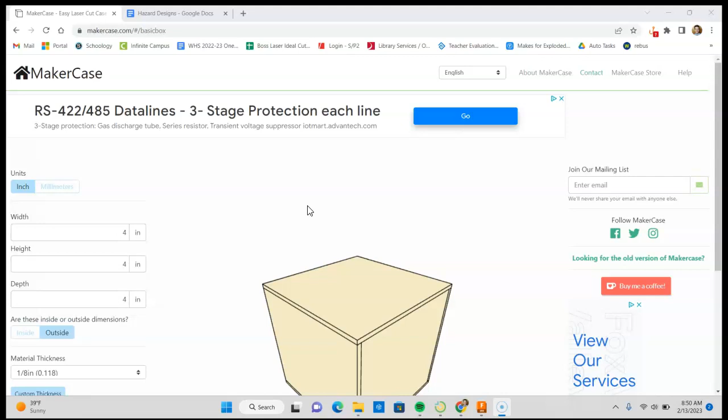Alrighty, folks, recording a quick video here to show you what you can do in Fusion when you are making your hazard designs. So we'll start here really fast with MakerCase. I will make my case, let's say 20 by 4 by 4. This is going to be my base hazard. Those are the outside dimensions, 1/8 thick because that's the 1/8 MDF we're using.

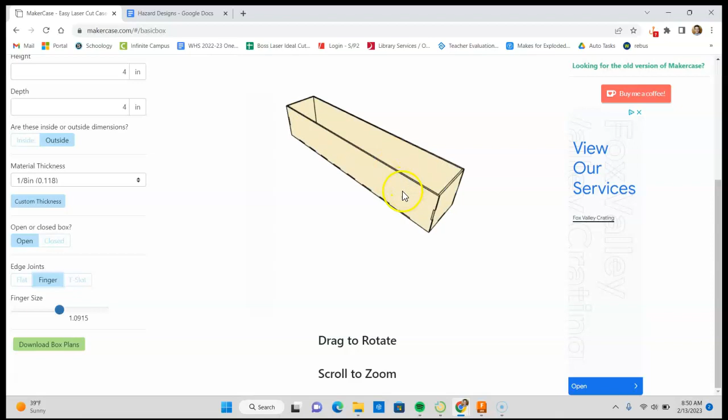I'm going to choose to make my box open. I'm going to have an open lid and I'm going to use these finger joints. And with the finger joints, you can kind of look and you can drag to make them wider or make them smaller and do what looks good to you. And I'll just pick something right here kind of in the middle-ish. Doesn't matter too much for what we're doing here.

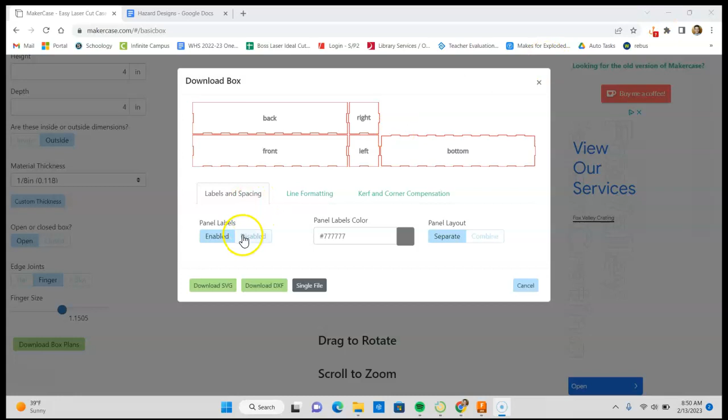Then I click download as a DXF. But before I download, it's going to be just a little easier in my life if I turn off the labels, I think. Download as a DXF, it downloads down here, but if I click it here, I'm going to be sad. Instead, what I need to do is go to Fusion. In a new design, I need to go Insert DXF file here. So I went up here, Insert DXF.

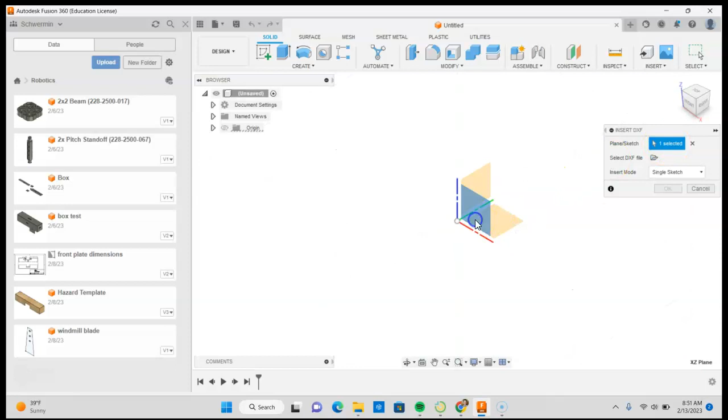I need to pick the plane. I'll pick this front plane. I've got to click the folder to browse for it, find it. It's probably in your downloads here. It's in my downloads. Then it takes a second to load, but then when it does, I can click OK, and now I've got my box as a DXF, which is great. And the really great thing we can do about this is now edit this.

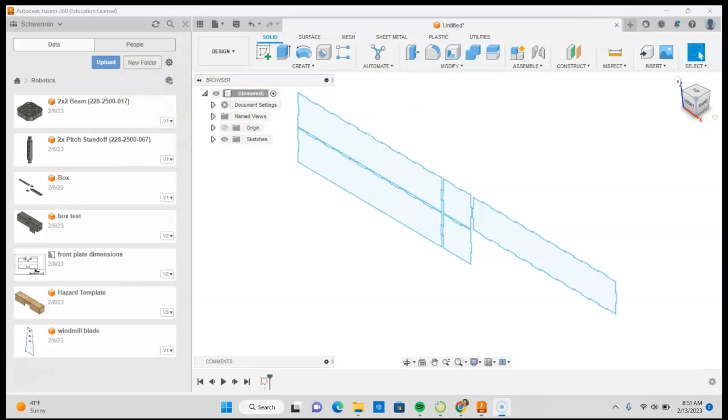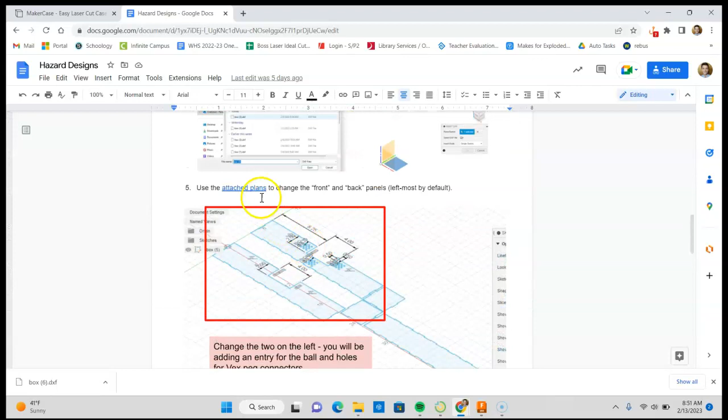So if we look at our hazard design here, and we open the attached plans to see it a little bit better, we see one thing we do here is on this flat edge, we cut out a box, because that's going to be the opening our ball is going to go through. So let's talk about how to do that. So I'll go to front view. I'm not in my sketch. Notice I'm in solid modeling, 3D modeling.

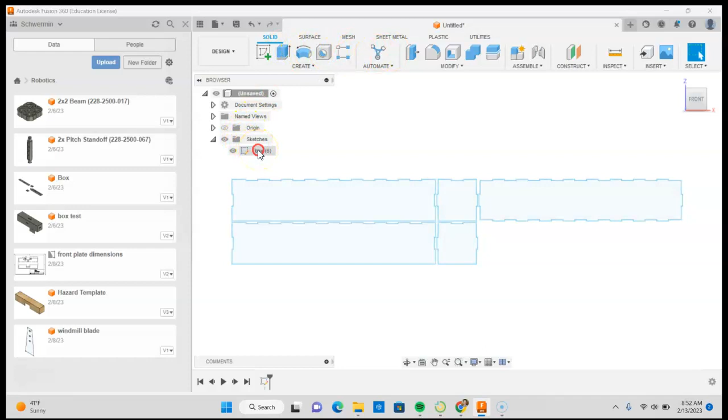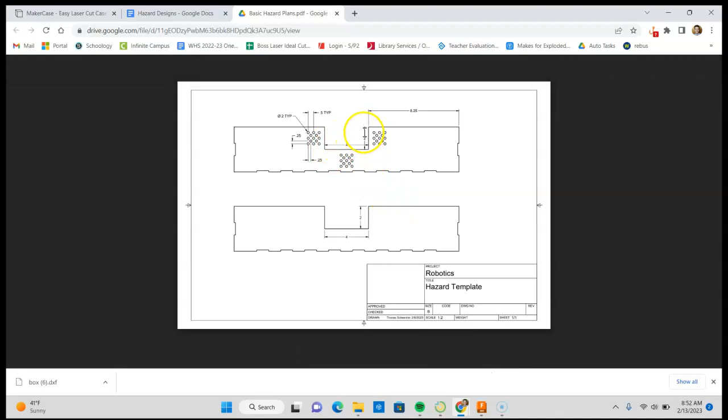I want to be in my sketch, so I can right click and say edit sketch. I could also double click if I wanted to. Now I'm actually editing this sketch and I see my two-dimensional sketch tools have showed up. The sketch menu has showed up. So one thing I want to do is I want to take my flat edge and I'm going to cut out a little box. That's what I'm looking at right here. And I know the box is going to be 2 inches tall by 4 inches wide. So I'm going to do that, and it's actually really easy.

I'm going to use the 2-point rectangle tool up here, click to place a corner, and I can even right in here type 4, type tab, type 2, hit enter, and I've actually made my box 4 by 2 right there. And you can see when I highlight this gray, just by hovering my mouse over it, this is going to be a profile I want, which is really good.

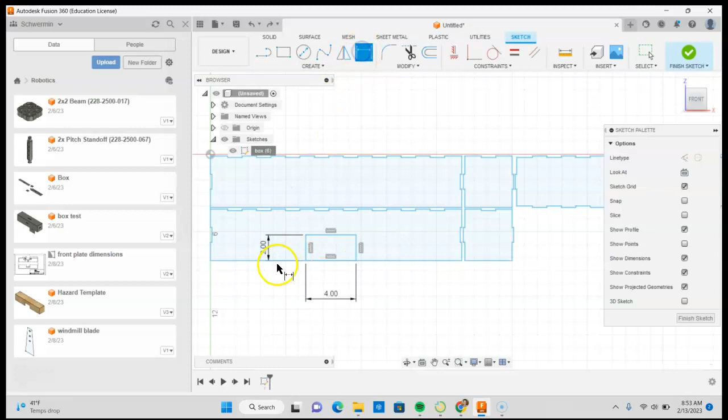One thing I still want to do is I want to make sure this is oriented in the right place, left, right, because what you'll notice is I should be able to drag this, and it's not really where I want it to be. So I'm just going to undo that. I'm going to use a dimension. I'm going to dimension this side here and make it 8 1/4, and that kind of sticks it right in the middle, which is where I want it.

And then I'm going to use the trim tool to trim away those lines. And all of a sudden, boom, now I have this. If I were to finish this sketch, I could extrude that.

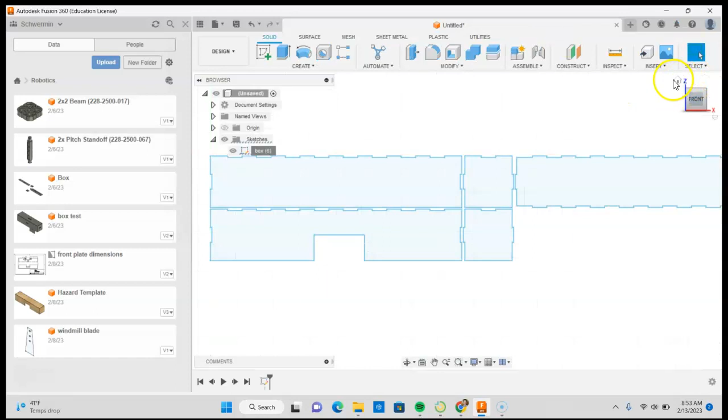Sorry, folks, if there's a little delay there. Little interruption happened, but I'm back.

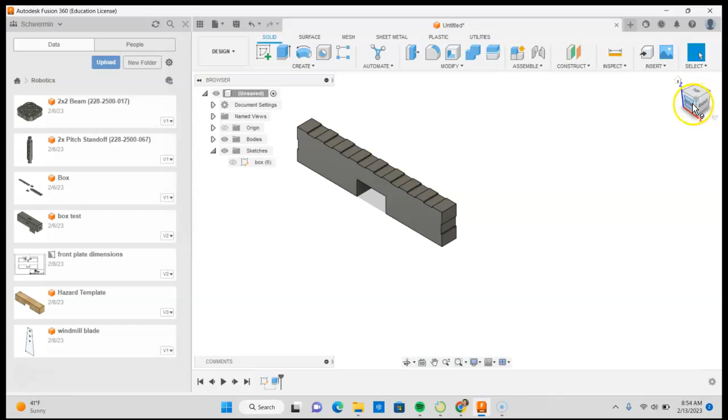So as I was saying, now if I use the extrude tool and I could drag this arrow, what you'd see, if I wanted to, is that I could make a 3D model of my little cutaway. But I'm actually going to Control Z. I'm going to undo that because I'm not ready to extrude it yet, because I want to show you the other thing you can do.

The other thing you want to do is add these holes, all these little small circles. What these are going to be for is to add your VEX pieces. So I, in my plans, have made a bunch of different spots on the sides and on the top. You can put these anywhere you want, wherever you think you need your VEX pieces to go. I'm just showing you places that I think might make sense if you're planning doors on the side or some kind of windmill or rack and pinion on top.

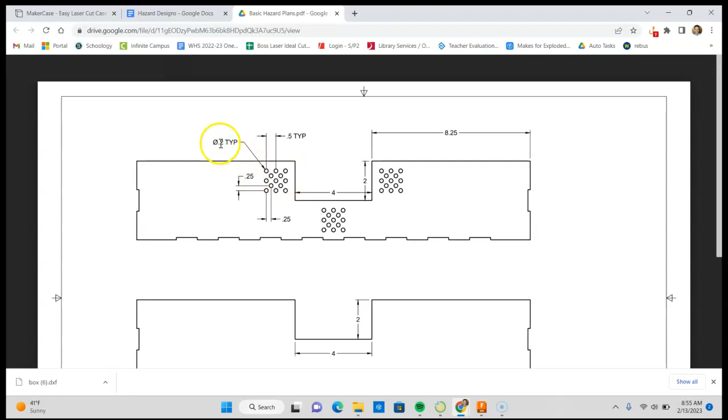To read this symbol, this little circle with a line through it, it means diameter. And the TYP just means typical, so all these little holes have a 0.2 inch diameter. That's super easy to do. I'm just going to zoom in, create a circle, and pick anywhere, because for our purposes right now it doesn't matter too much where I put it. While this dimension is highlighted, I type 0.2, hit enter, and I've made a 0.2 inch circle.

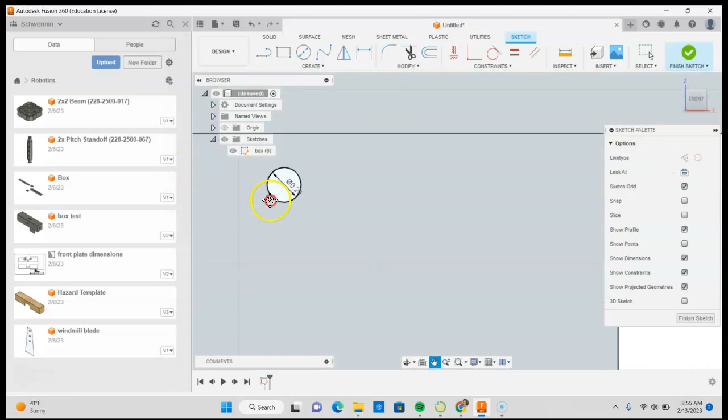Now if I wanted to be really tedious, I could just keep making 0.2-inch circles and make it in a Vex pattern, but that would take a long time. There's actually a really easy way to do it, which is to use the Create Rectangular Pattern tool. This tool is really powerful.

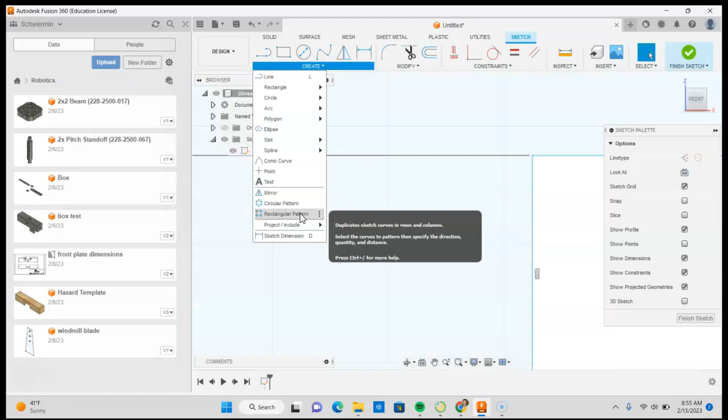What it lets me do is first select objects, here where it says objects. So the object I'm going to select is my circle. I'm going to highlight the circle and click it. And then the easiest way, in my opinion, is to use these arrows to drag out this way and drag out this way. I can already see the outline I'm going to make. I'm going to make a 3x3 grid.

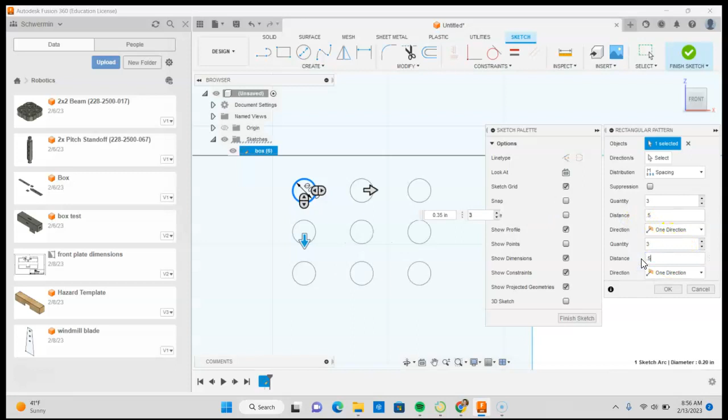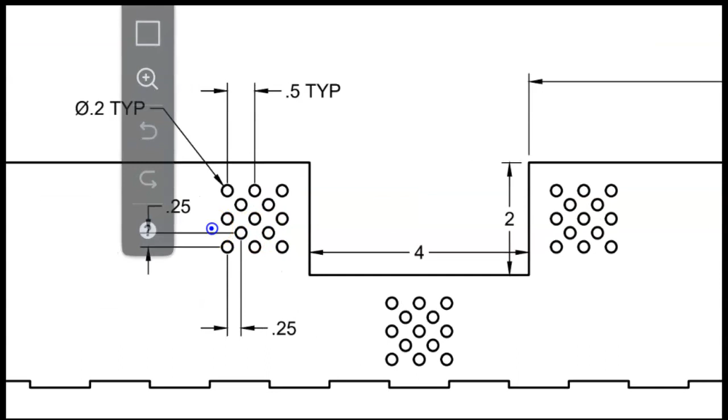A really nice thing I can do is there's two types of what they call distributions: extent and spacing. I'm going to use spacing and make the spacing a 1/2 inch, 0.5, and the same in the y direction, 0.5. The reason I'm doing that is in this drawing here I see that from this hole it shows me that it is 0.5 inches to the center line of the next hole. So I'm going to make this 3x3 of these outer holes, like 1,2,3 by 1,2,3. That's what I'm making right now in Fusion.

So I've made it 3x3 at 0.5-inch spacing, and I click OK. Now, rather than making a bunch of holes individually, I've made 9 of them with just one command. The nice thing about this is if I realize I actually made it wrong and want them to be smaller, like 0.156, I can do that, and they all update. So that's one really nice thing about it.

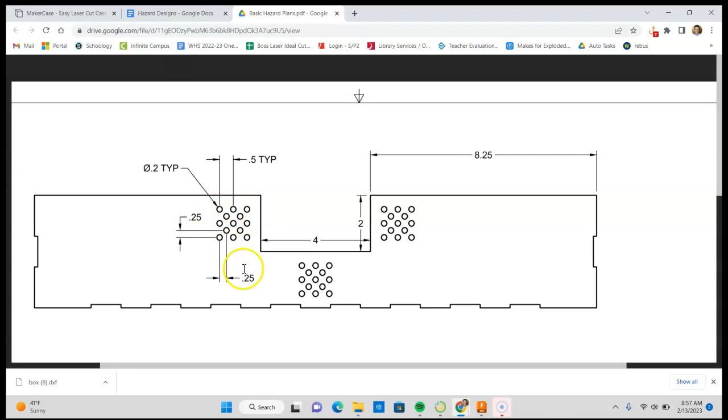Another thing I can do that in this case might be convenient is good to know about: I want to see how I can make these offset circles. So I've got the 3x3 that are 1/2 inch, but I see in this there's almost this every-other pattern that's only 0.25, a 1/4 inch away. There's more than one way I could do this, but something I like to do here is click and drag to select 4 of them.

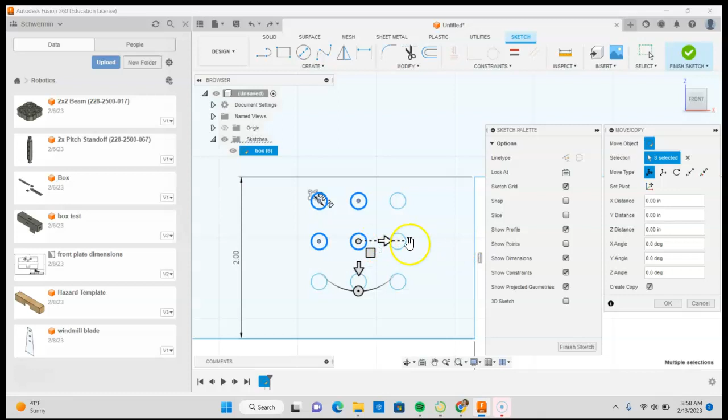Click and drag, these 4 are selected. And if I use the Modify Move/Copy command, or I can type M on my keyboard, and say create copy, I can move it in the X direction, this left-right direction, a 1/4 inch. And I can move it in the Y direction, also a 1/4 inch. That has now taken my 4 pieces and moved them over a 1/4 inch to the right, a 1/4 inch down. If I click OK, now I see, oh great, I've made a new version of it.

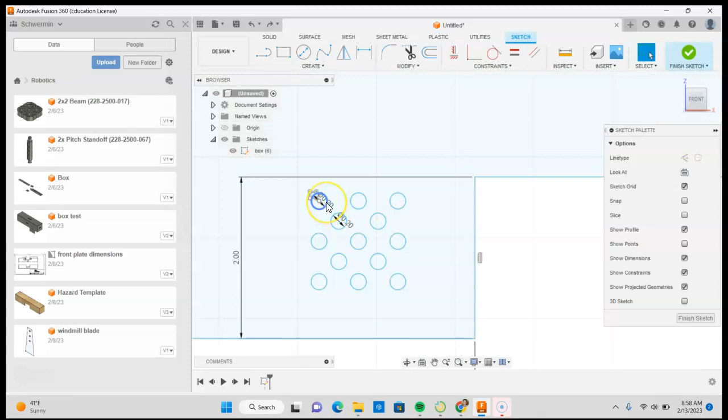Now this one is dimensioned separately from the first one because it was a move copy, not a pattern command. So if for some reason I wanted these to be smaller, I could. I don't necessarily need to, but because it wasn't a pattern command, see how only that one changes, these 4 are not changing. So I would need to use some kind of strict constraint or pattern command if I wanted them all to change. But since I'm happy with the first one, they're all 0.2, I'm happy with them.

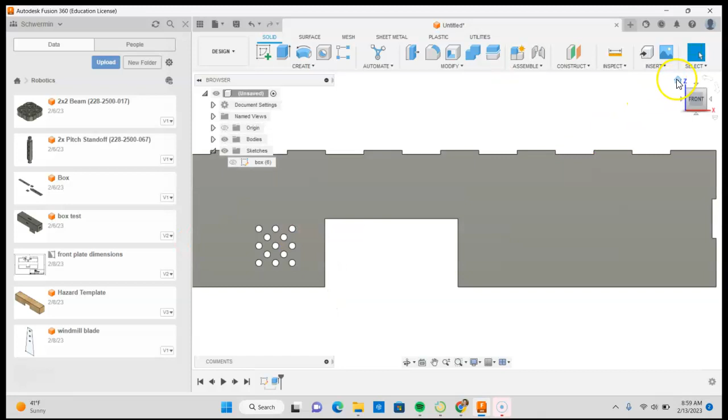And then we're good. If I finish this sketch and extrude this 1/8 of an inch, see by default none of those holes get selected, and so it would make those holes, which then when I were to laser cut those out, I could plug my Vex pieces into.

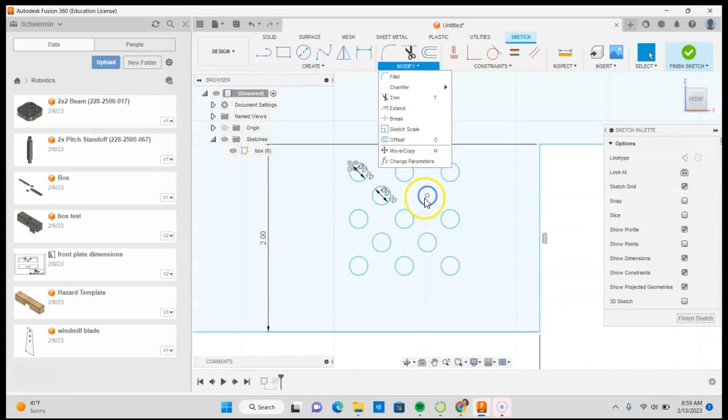So there you have it, folks. You can use simple rectangles and dimensioning to make this big hole, and then practice using the rectangular pattern, which is under Create Rectangular Pattern. And we can practice using Move Copy, which is under Modify, to get these cool circle patterns. And that's some cool stuff you can do in Fusion.